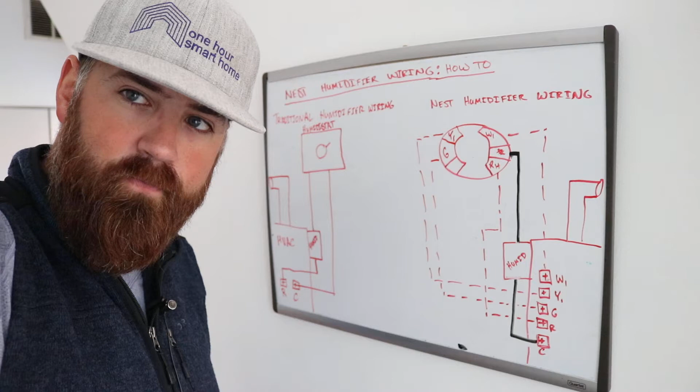Hi, James here with 1hoursmarthome.com, and today we are going to teach you how to wire up a humidifier with your Nest thermostat. So what we've got here today is two wiring diagrams, one for a traditional humidistat setup that you probably already have if you've got a humidifier in your house, and the other one is how you need to wire your humidifier if you're going to attach it to a Nest thermostat.

So there are a lot of people that have a Nest thermostat and a humidifier, and maybe you connected the Nest thermostat and you don't know how to connect the humidifier, or you're looking for information, or maybe you got stuck, or maybe you just left the old humidistat on there to control the humidifier, which is fine. It'll still work with a Nest thermostat and an old humidistat.

But if you want to have everything in one place, you want to get rid of that old humidistat and just have the nice clean look of the Nest, that's what we're going to teach you how to do today. We're going to teach you how you need to wire up your humidifier so that it'll work with your Nest thermostat. So to understand how to wire this up, you kind of have to understand a little bit of the basics of how your humidifier and humidistat are currently wired.

So what we've got here is just a drawing of an HVAC system and how a typical humidistat is wired. So what you've got is a humidifier, a humidistat in your HVAC system, and then some wiring. Most humidifiers are powered by a plug that plugs in somewhere near your furnace. So that's the 120 volt that runs the actual fan. But they have a little valve in them or a contact that then turns on either the fan or opens up a valve to let water into the humidifier, so then it will flow throughout your HVAC system.

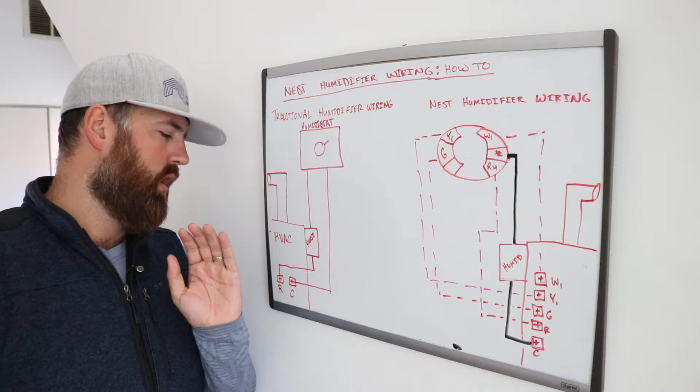So how that works is you have two wires on your humidistat, and it's a very simple system. Basically what you have is one wire coming from the R, which is power, that goes through your humidifier. R goes over here up to the humidistat and then goes back down on another wire which is connected to C. And these are the terminals inside your HVAC system. And how it works is when the humidistat detects a certain humidity, or you set it to a certain humidity, that will close this circuit and it will allow the valve or relay here to turn on your humidifier. So just think of the humidistat as an on-off switch, basically.

Once it reaches a certain level, it will turn off, and when it detects the humidity is too low, it will turn on your humidifier, and it's just a very simple circuit. R, providing power to the valve or the relay, goes through here. Once this closes, because it detects the humidity is too low, then you have a completed circuit. It will turn on the humidifier, and that power flows back to the C wire.

Now, here's the thing. The Nest only needs one wire to work with the humidifier. So with this setup that you've already got, you're like, okay, I got two wires, but I only have one terminal on the Nest for a humidifier. How do I do that? Well, that's what we're going to get into. So on the Nest, there's a variety of different terminals. We've abbreviated them here, but the terminal that you use for your humidifier is the star terminal, okay? And there's a setting within the Nest that will allow you to pick what the star terminal is for once you've got it set up and the wire actually plugged in there.

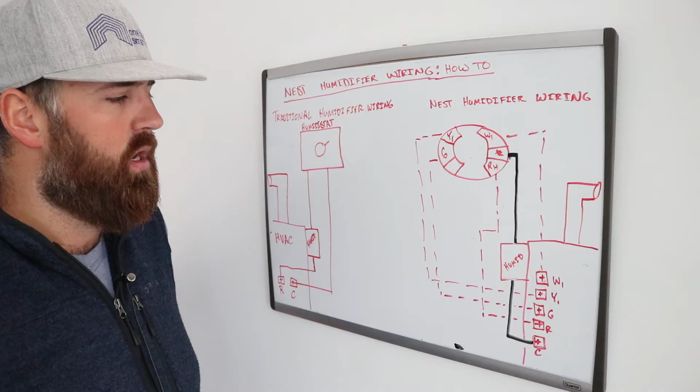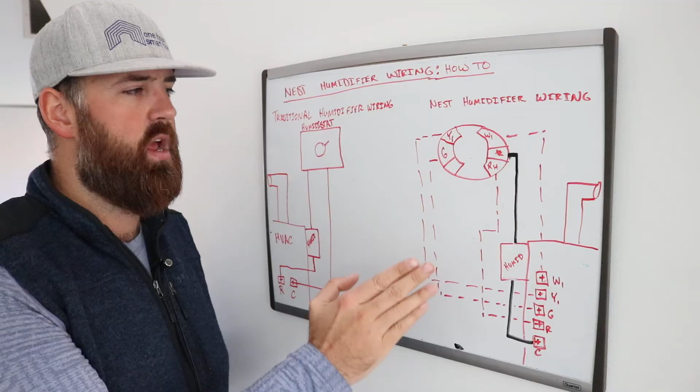But with the Nest humidifier, because the Nest is already getting power, it already has power coming in from your RH or R wire or RC wire in that terminal. All you have to do to complete the circuit for the humidifier to turn it on is provide power back down that terminal and then back down to the C. You just have to complete a power loop that goes through your humidifier down to your C.

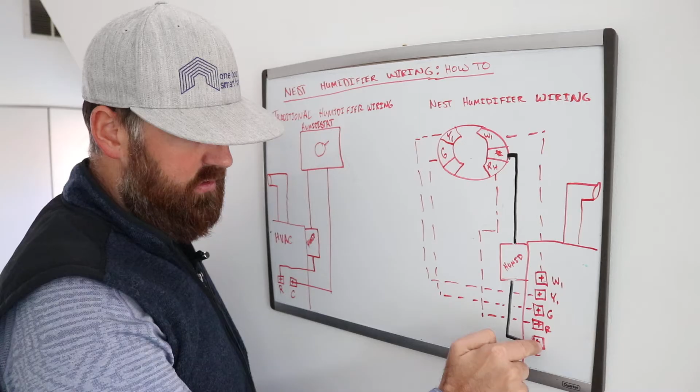So how you have to have it wired is you have one wire coming from the star, going down to that valve on your humidifier or the contact or relay on the humidifier, and then on the other side of that valve or contact, you need the wire to go from the humidifier down to your C terminal. And what we're doing is we're just creating a loop here between the R wire and the star terminal. When the humidifier is activated on the Nest, the power will then go down the star terminal. It will activate the humidifier, and then from there, that power has a path to go back to the terminals inside your HVAC system, the C terminal.

So the R wire, you don't have to run an extra R wire. Everything shown in the dotted lines is what a typical Nest thermostat wiring is. The R wire is power. You're gonna have that regardless for the power of the thermostat to operate at just normal heating and cooling mode. So all these other wires, RH, that's your power, G is your fan wire, Y is your AC wire, and W1 is your heat wire.

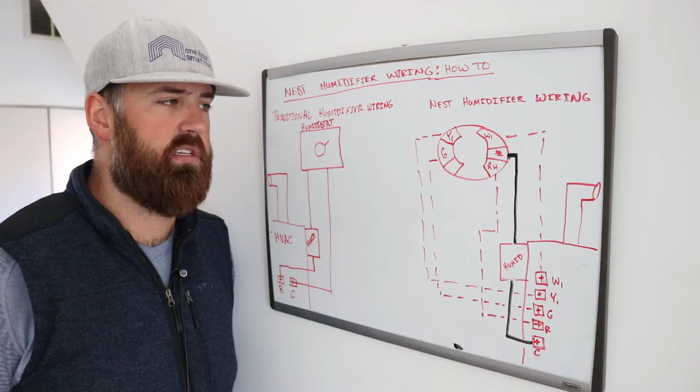And those are shown in dotted lines because those are part of your thermostat system that you would have regardless of this humidifier connection. And of course, those wires all then go back to the wiring terminals in your HVAC system. So it's actually really simple to install a Nest thermostat with a humidifier. It's just that there's a lot of confusing information out there, and you start with 2 wires and you really go down to 1. So you kind of have to understand how it works in order to make this happen.

So it may very well be that you have a wire that's already wired up like this R wire here on your humidistat. You'll be able to tell because they're going to be different colors, the R and the C wire that go to your humidifier terminals in your humidistat. Sometimes the easiest thing to do rather than mess with this other wire is just take your R wire that's coming from your humidifier, switch it over to the C, and then take that same wire, the R wire that you found, and put it on the star terminal there. So you may actually have to move these over.

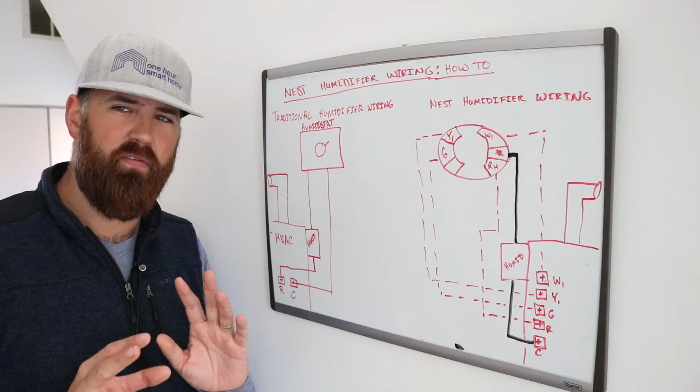Everyone's humidifier is wired a little bit different, but the circuitry for a humidifier is the same. These things are powered externally by 120 volts to move the motors and everything, but the relay and contact is low voltage inside, or the little valve that opens the water up for your humidifier. So all you really need to do is make sure that you have a circuit for power for the humidifier.

So just like we've shown, power's coming in R, that's your normal thermostat power wire, and it goes back out through the humidifier. You just need to make sure that when you have your humidifier set up, that this wire provides a continuous circuit down to the C wire so that when power is sent from the Nest to the humidifier, it has a place to go from the humidifier back out to the C wire to complete a circuit.

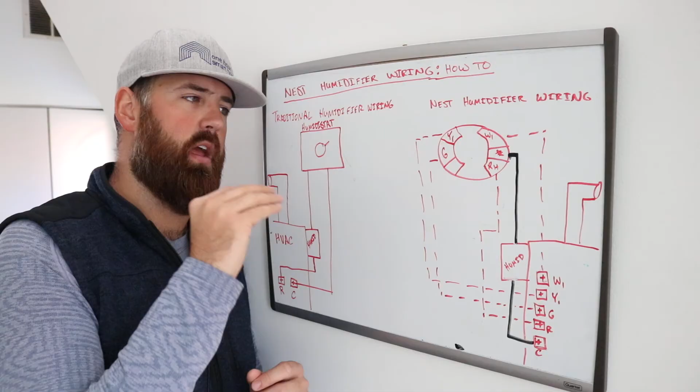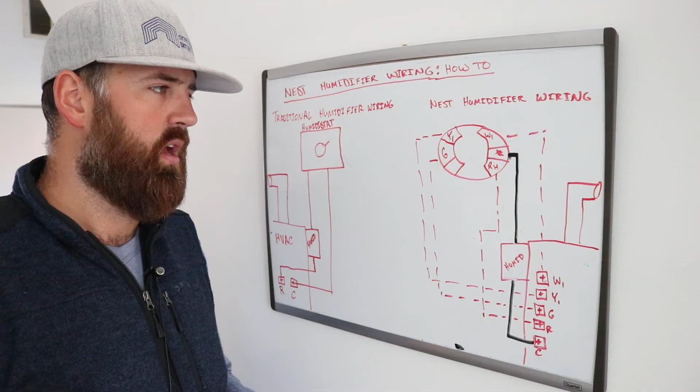So the Nest, when it calls for humidity, it will actually send a signal, a power signal, 24 volts, down this humidifier wire. Otherwise, it's unpowered until there's a call for humidity. So once you've got it set up, you can test it by turning the humidity way up to, like 60% or whatever the maximum limit is on the Nest. You can go stand by your humidifier, and typically you'll hear either a fan click on or you'll hear the valve click when you're doing it. So that's a good way to check what's going on.

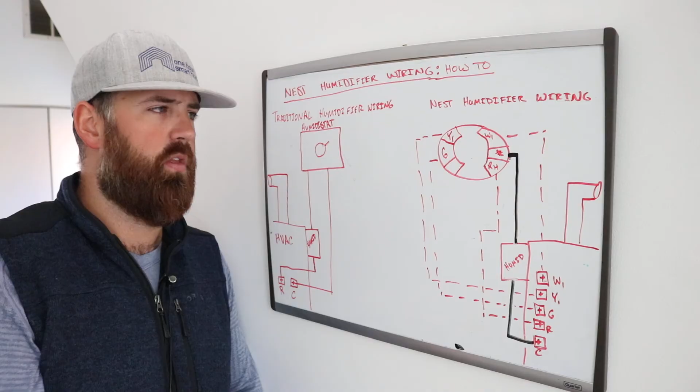You could also use a multimeter for all this to check continuity and where the wires go, but that's a little bit more complicated. It's easy enough if you just follow the wires that you've got here in your existing humidistat and then convert that over to the wiring diagram that I've got shown here for the new Nest humidifier.